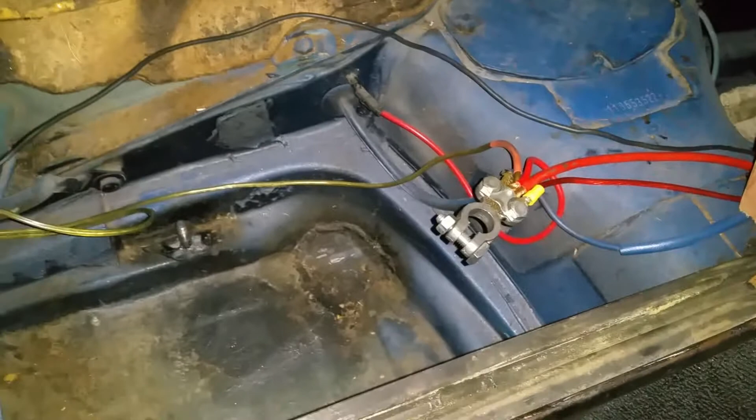Okay, so what am I doing again? I am going to put the battery back on the blue car, the blue bug.

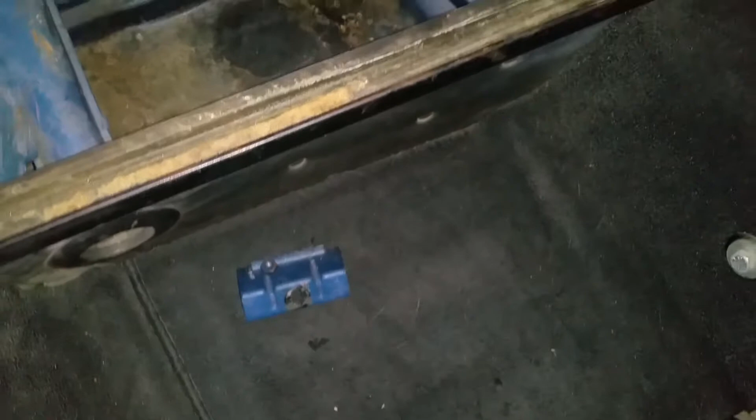There's my bracket right there. This car, hate to say it, but it's like a weekend warrior kind of car. He doesn't really drive it as much, he drives his GTI most of the time. It's been sitting for such a long time. That's a brand new battery, brand spanking new.

See, that is June 5th, 19. So it's what, like a year and 3 months old, something like that. And it's been basically self-discharging because he never runs it.

I have a battery tender thing that you can plug it into, and it'll trickle charge it. But those things don't work, especially if the battery's brand spanking new and hasn't been formed yet. A lot of battery companies will never ever fully form a battery, never fully form a battery. They only give it enough just to get it out the door.

Trust me, I used to work there. Okay, I used to work there, I know how things work. Anyways, so that battery wasn't fully formed, so it was self-discharging.

This is 1,000 cranking amps because he's got two audio amplifiers, so 1,000 cranking amps. So what I had to do is basically run it on my bug on this side, and charge it up, man. And I could tell on my gauge, my voltage gauge, instead of going to 14, it would go to 13.

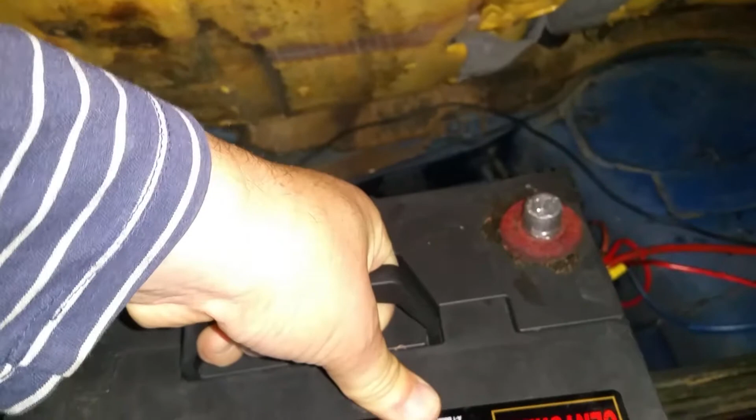Except this is heavy. Oh boy. Oh my God, 1,000 cranking amps? Yeah, that's heavy, dude. There we go.

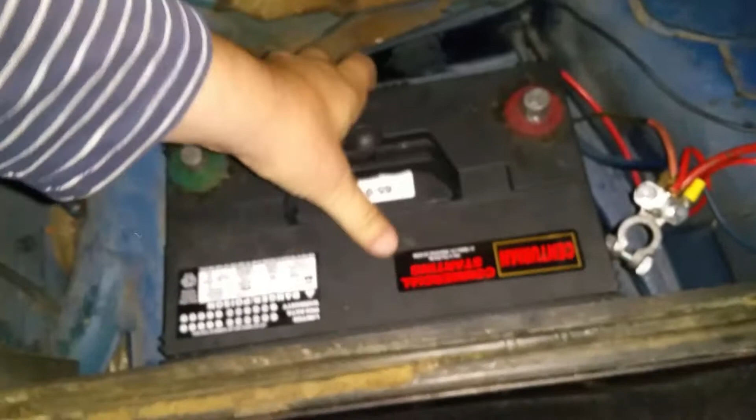I'm trying to make sure that it catches on the, what you call it, no, it's not, on the little lip on the bottom, so that it locks the battery.

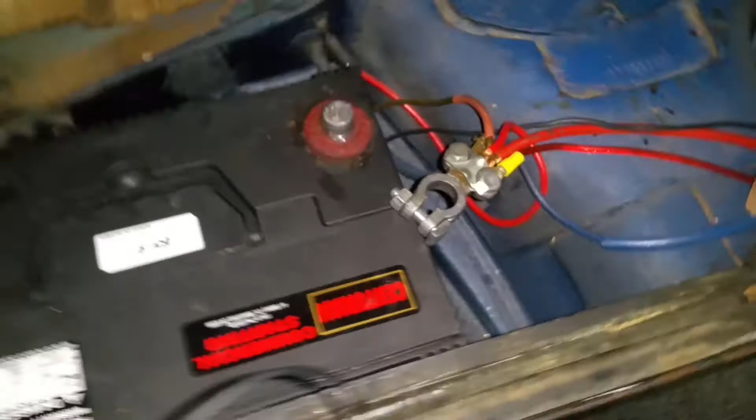For that I'm gonna need two hands, unfortunately, so I'm gonna have to pause. Okay, nut is on. So I'm gonna go ahead and tighten these things, and that should be enough.

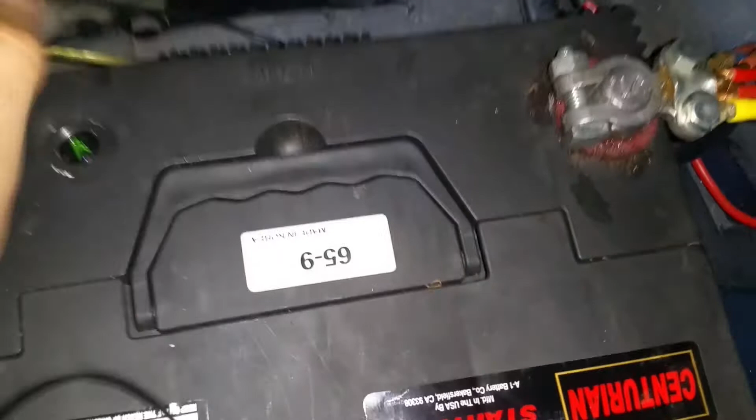Right there, and this one. And look at that, it's got a nice green ball now. It used to be black, so it cleaned up really nicely. Okay, I'm gonna go ahead and tighten that thing and the terminals, and that should be it.

Alright, so I got that all tightened up. Yeah, hope you like my little stick there that I'm using. It's a 2x4 to keep that seat up. Gotta do what you gotta do.

So I don't expect this thing to start up because it's been so long. Carburetor's probably dry, since it uses a mechanical pump, so I'm gonna be pumping and pumping and pumping until it starts. Yeah, let's see what happens. I don't think it has any gas. I don't even know why I'm pumping it.

Come on, baby. Come on, baby. There you go.

I mean, she sounds so good. She's a bone stock 1600, single port, bone stock. She sounds so good.

Ah, stereo turned on. Yeah, this is this bug. See, this one has seat belts, 3-point. Those are factory. That mounting point right there is factory. And anyways, so they just plug in, you know, it's a 4-seater.

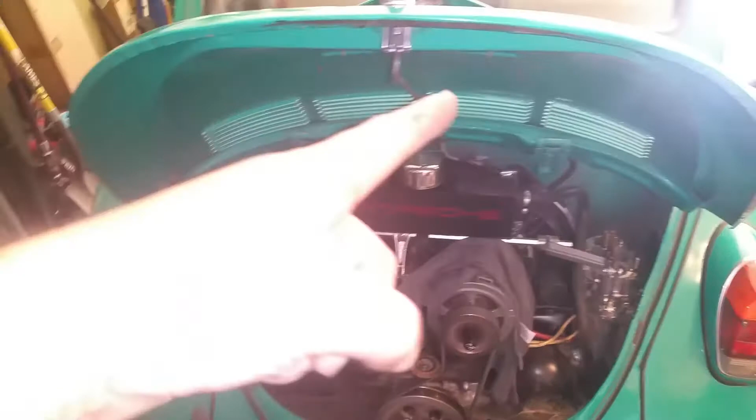And now to this car again. Yeah, we're pretty much at it again. I actually went ahead and removed the tops again. I'm going to change the fuel bowl level again. I'm still popping on that carburetor, and this one pops every once in a blue moon.

If you remember, if you've seen my videos, you'll know that the one which was reading the highest amount of fuel on the fuel bowl never ever popped, ever, like ever. And it still pops once in a blue moon. But this one continues to pop, and it's just really irritating, especially when the car is really cold. That one just pops and pops and pops and pops, and I just can't get rid of it.

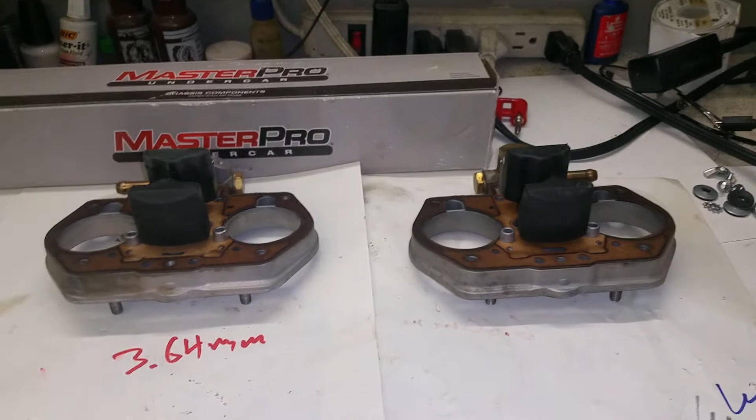So I'm going to go ahead and change my fuel bowl settings again. Let's see what we're going to do. Okay, here we are on my workbench again. We're going to change those settings again.

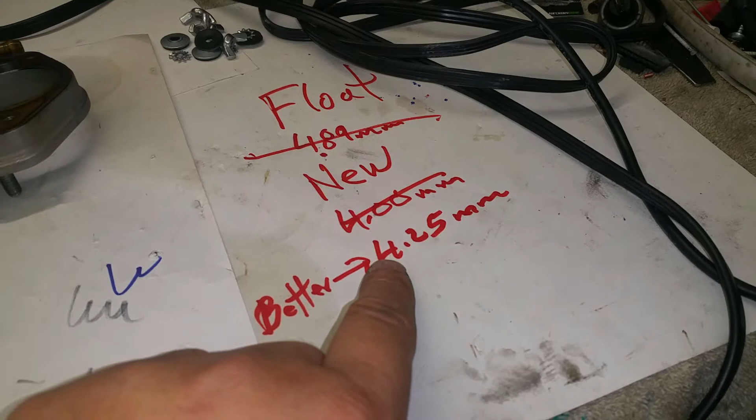If you remember, last time I did this, this is where I seem to make the maximum power, which means I'm probably going to have to readjust my jets. Doggone it, but that's okay. So we're going to go actually lower than 4.

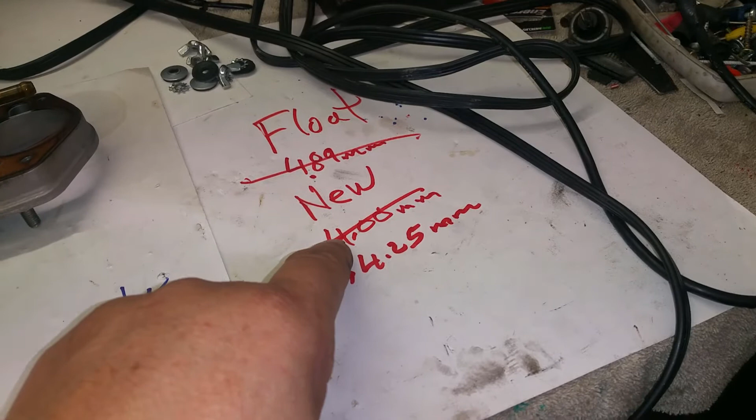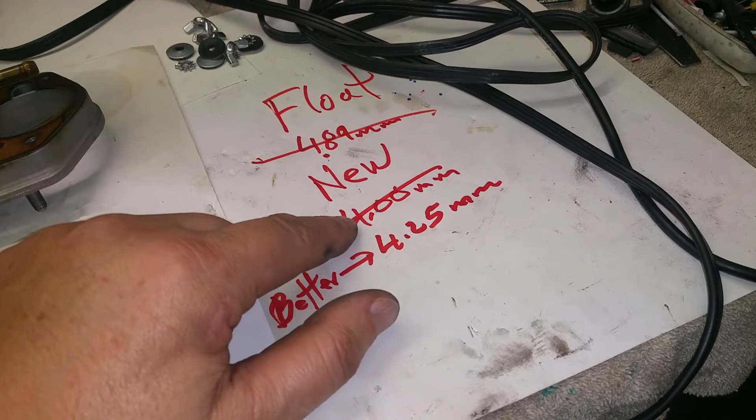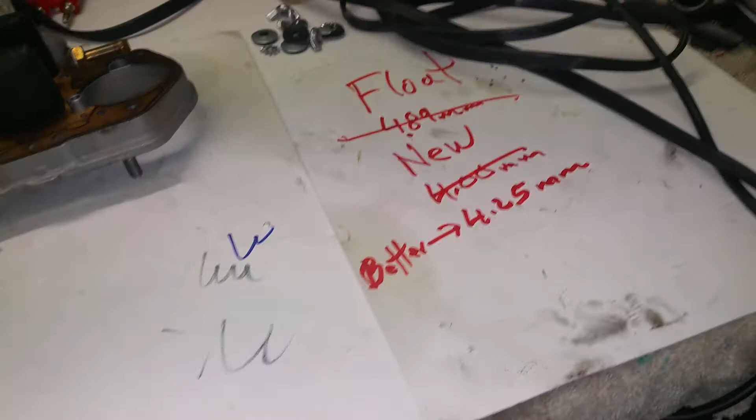We were running at 4, and we went up to 4.25, and she started to pop again. So either I'm going to run at 3.75 or 4. But since I already ran 4, I'm going to run 3.75 on this. When I say 3.75 millimeters, I mean 3.75 millimeters between the paper and the very bottom edge of the float.

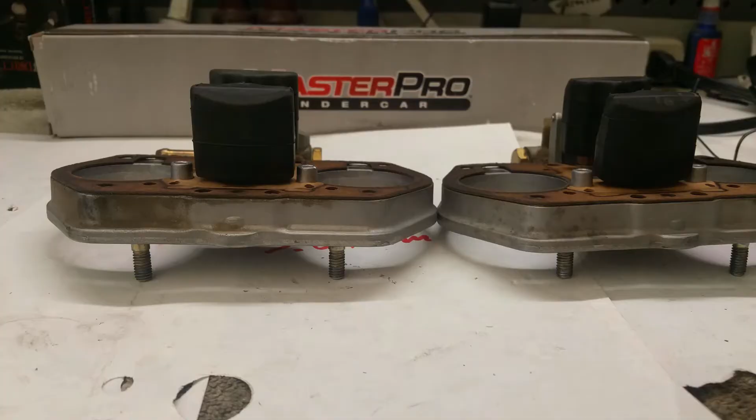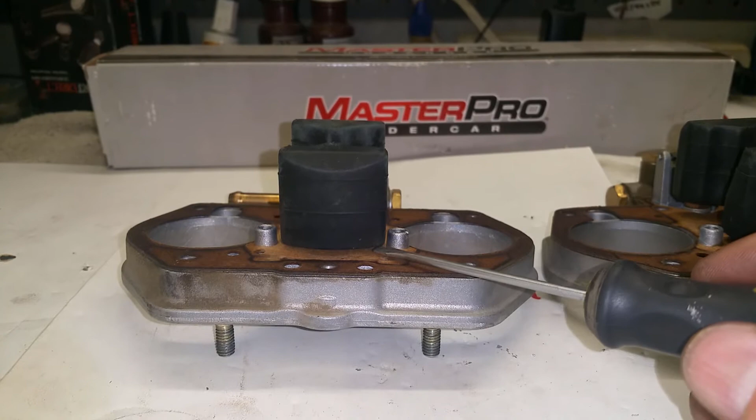So, like right there. We're going to do the exact same thing on both of them. Okay, so I went ahead and changed them. Now, look at that. I went basically half the height of this, half of it to the very bottom edge, which happens to be 3.

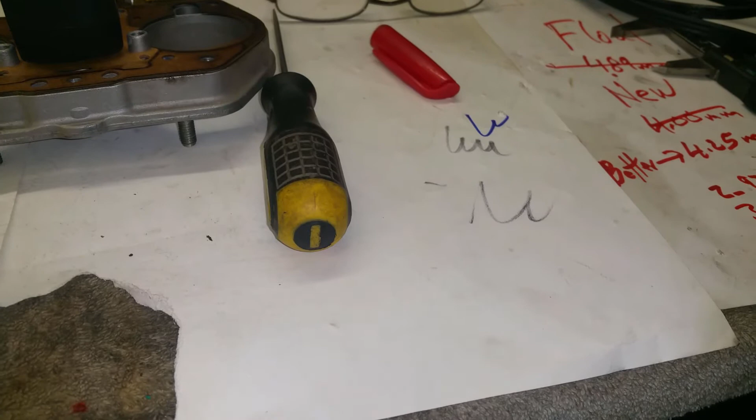This is the one that was never popping, never gave me any problems. That one, as I recall, was like 2.93 millimeters in height. But I'm actually going to go with 3. So it's going to be very close to where that one was, which never ever popped.

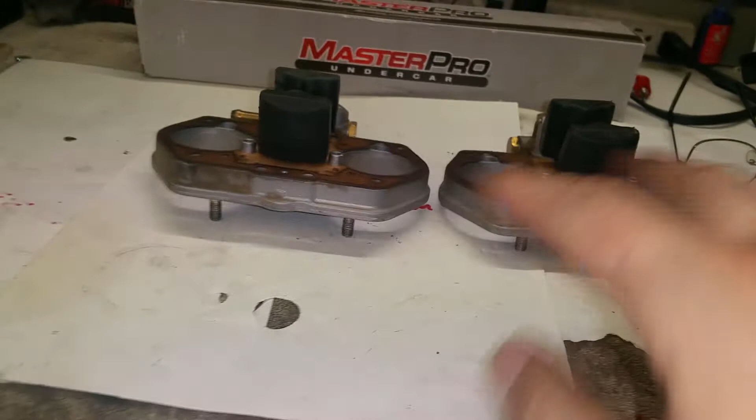So now both of them are exactly the same. The thing is, there is no information on what the measurement should be right here with the weight on them. There is no information whatsoever anywhere. So this is uncharted territory. That's what I'm doing.

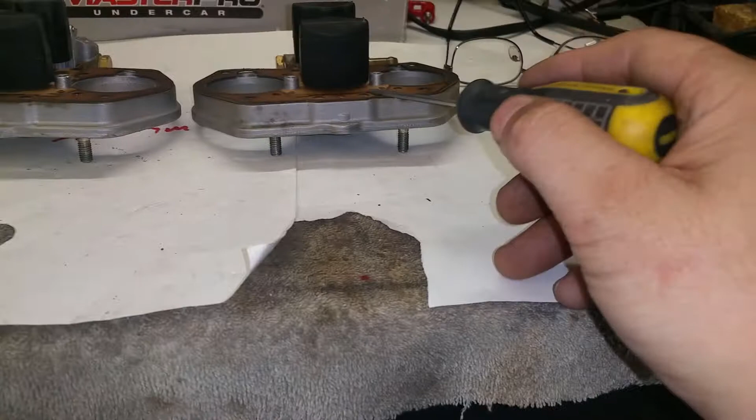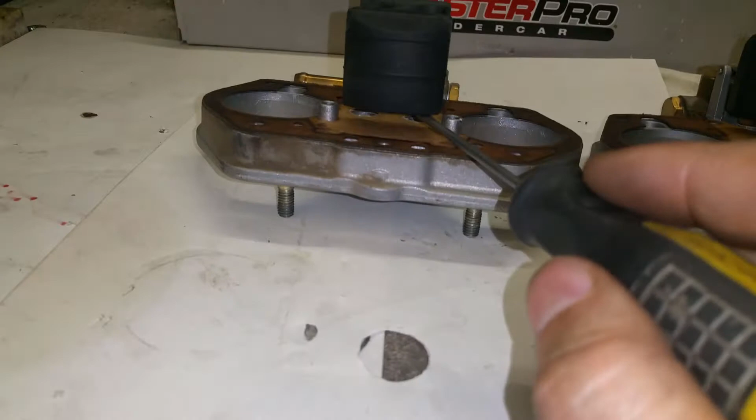I'm trying to get rid of this popping on this one. This other one wasn't popping, but it was running at that level from the paper to the bottom edge. And this one was actually running right here. See, so there was a huge difference. This one was way up here, and that one was like that.

Really low. Okay, so I'm just going to put it back the way it was, kind of, sort of, a little bit higher, just by a hair. And this one mimicking that one. Let's just go see what happens. I'm going to go put it back together. Hopefully it should run richer.

I know it's going to run richer, so I might have to adjust my main. Idle will just be the enrichment screw. But idle should be the same. Let's go put them on.

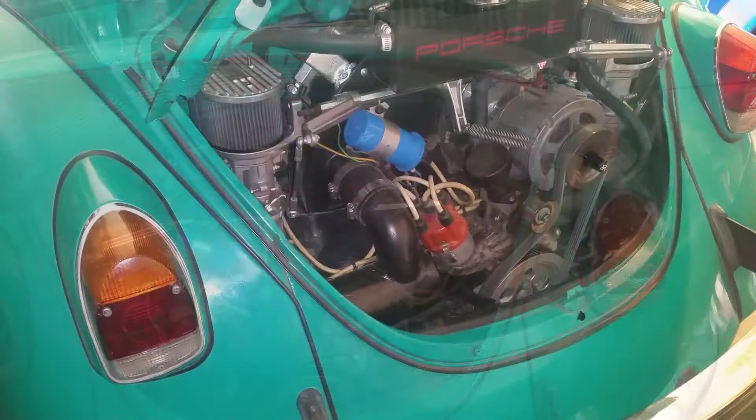Okay, that's the first one. I'm going to go ahead and put everything together, and we'll go out for a pull, see what happens. Okay, I got it all back together again. I'm going to go ahead and start it all up.

This is the one that's popping, so that's why I got the camera on this side. When it's cold, it always goes pop, pop, and then it just kind of goes away. Every second that passes, it goes away, but it always does it when it's cold. Let's see what happens.

Zero pops. Would you look at that? No pop at all. It should have popped. It didn't pop. Okay, so the setting is 3 millimeters on your fuel bowl from the paper to the bottom of the float. Period.

I am so happy. All right, let's go for a ride. So it appears like it actually got smoother, like the low idle. I can drop down to like 1200 RPMs in second gear, and I'll give it gas, and it's very, very smooth.